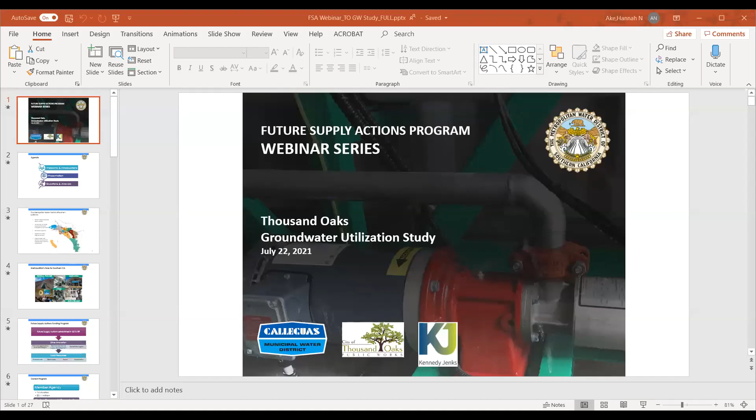Starting webinar in 5, 4, 3, 2.

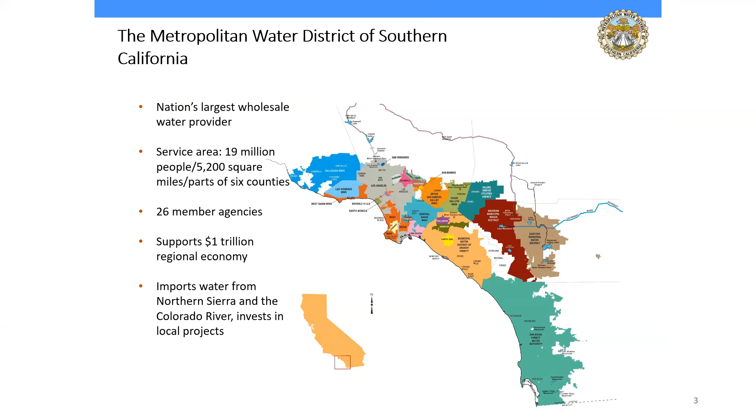Next slide. Over the past 30 years, we've invested billions of dollars to diversify our resource portfolio. That includes investments in storage, transfers, conservation, and local supplies. Innovation in local supplies is going to be fundamental to our success as a region as we continue to advance our One Water future, our One Water approach.

And this is where our Future Supply Actions program fits in. Next slide, please. The FSA program was established in our 2010 Integrated Resources Plan with the goal of driving innovation in local resources. Through our program, we collaborate with our member agencies to fund studies that pilot new approaches, pilot new technologies that create new supply development opportunities by addressing barriers to supply development. That could include technical barriers, institutional barriers, and regulatory barriers.

Benefiting the region is the core principle of the FSA program, and thus the purpose of this webinar. We want to share the results of these studies with as many people as possible. Finally, the water industry is risk adverse. It's through these studies that we de-risk technologies so that we can apply them to our operations.

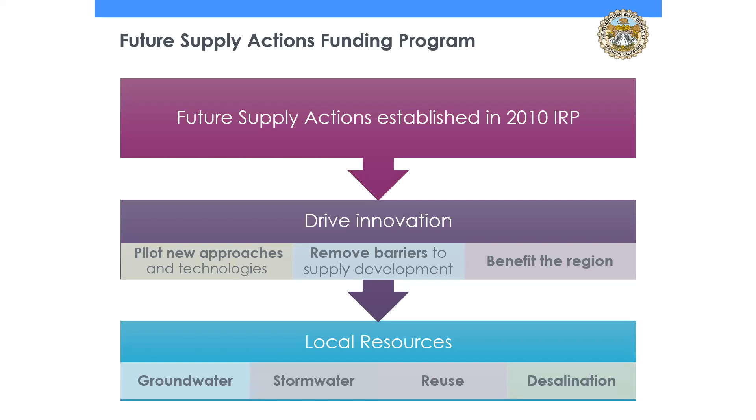Next slide. So our current FSA program includes 14 studies with our member agency partners, and they cover all 4 resources under the FSA program: groundwater, stormwater, recycling, reuse, and desalination. But we've also funded 7 studies with the Water Research Foundation related to reuse and agricultural reuse. These studies aren't going to help us with this current drought that we're in right now, but they will help us with future droughts, the next drought, and the droughts to come.

So next slide. All right, so the focus of today's webinar is the Thousand Oaks Groundwater Utilization Study. This study evaluates the use of closed circuit reverse osmosis, or CCRO, as applied to brackish groundwater desalination. Our member agency partner for this study is Calleguas Municipal Water District. Our presenters today include Ida Feruzin, an associate engineer with the City of Thousand Oaks Public Works Department, and Steve Diamond, a senior project manager and water treatment expert with Kennedy Jenks. At this point, I'll turn it over to Ida to introduce the study and launch the presentation. Ida, take it away.

Good morning, everyone. Thank you so much for joining us today. First of all, on behalf of the city, I would like to express our deep appreciation to Metropolitan Water District and Calleguas for supporting our project.

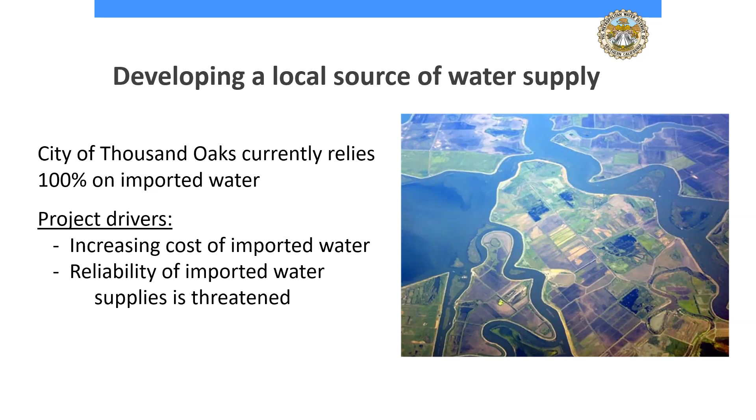Currently, the city's primary water supply is imported from Northern California through the State Water Project. As you know, the availability of the imported water is subject to long-term hydrologic patterns in the delta and can be substantially constrained during sustained drought conditions. As a result of these issues and increasing cost of imported water, the city is looking into developing local sources of water. Next, please.

In 2016, the city hired CDM Smith to prepare a study evaluating the feasibility of developing local water supplies. The study concluded that the Conejo Valley Groundwater Basin is a viable source of water for the city, and a near-term recommendation was to put the existing well located at the Los Robles Golf Course back into service and treat the groundwater.

To take this study to a higher level, in 2018 the city hired Kennedy Jenks to evaluate the feasibility of treating the groundwater at the golf course well to meet groundwater quality standards for both irrigation and potable water. This study looked at three critical issues: sustainable flow from the well, treatability of groundwater, and brine disposal feasibility. The recommended treatment technologies included conventional reverse osmosis and closed circuit reverse osmosis as primary treatments, with green sand media filter treatment for iron and manganese removal.

In March 2019, a 6-month pilot project was implemented to better optimize the treatment process and refine the design criteria, which is our presentation today.

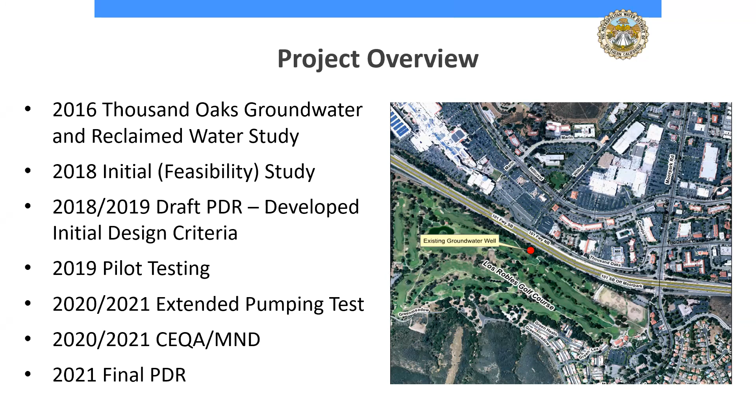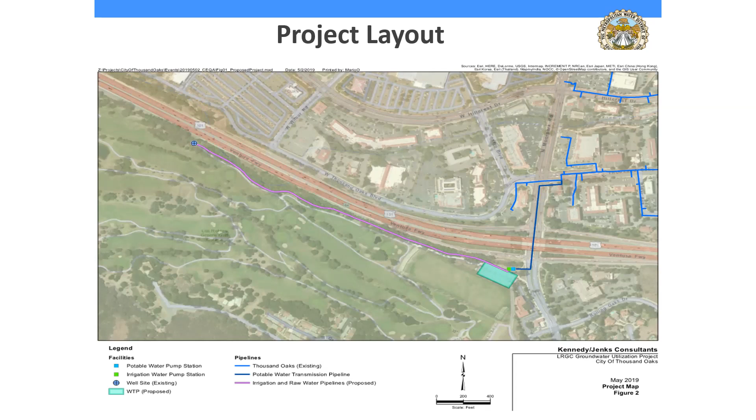As mentioned, in 2019 we conducted a 6-month pilot project. The goal was to refine the raw water quality and design criteria for key unit processes, including iron and manganese pretreatment, reverse osmosis, and closed circuit reverse osmosis. Another goal was to optimize performance of treatment trains and operation and maintenance requirements, and last but not least, to provide the city with operational experience.

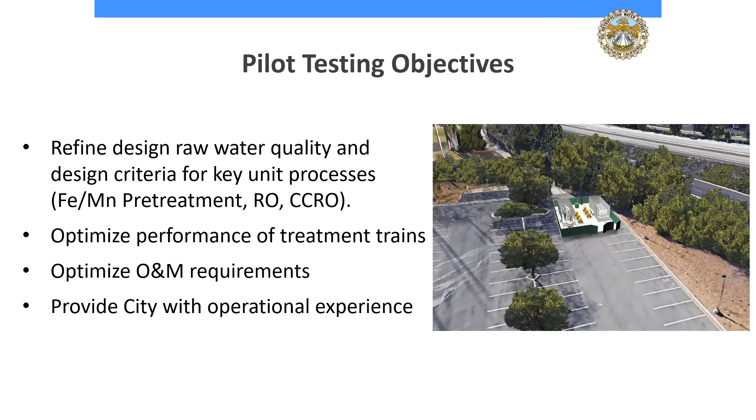So the first few slides we'll go over are on the equipment and the methodology, and then the last few slides are on the findings and results.

This project treats brackish groundwater in the Conejo Valley groundwater basin for both golf course irrigation and potable water uses. As a result of the treatment goals for both uses, desalination is required. Conventional RO and CCRO, or closed circuit RO, were identified in the feasibility study and draft PDR as the primary treatment alternatives, both utilizing RO membranes, and were identified for comparison as part of this pilot test.

A key component for these processes is pre-treatment, and historical groundwater quality indicated elevated iron concentrations. This pilot testing looked further at pre-treatment requirements with respect to iron. The alternatives were essentially iron removal versus no iron removal. For iron removal, we tested oxidation and filtration using chlorine, green sand filtration, and sodium bisulfite for dechlorination prior to the reverse osmosis and closed circuit reverse osmosis systems.

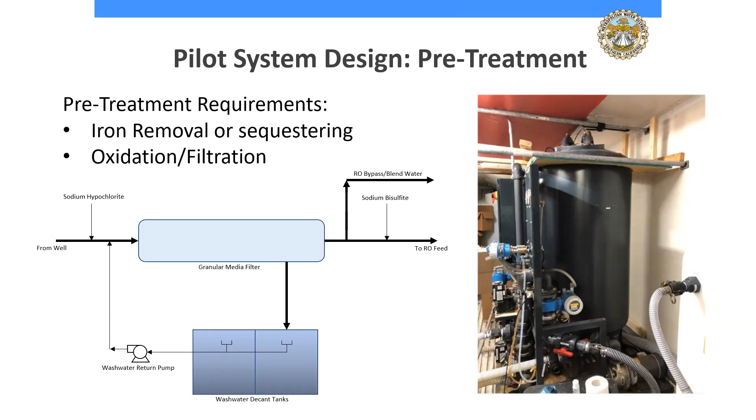The primary treatment alternatives included conventional reverse osmosis, a pressure-driven process where pressure is boosted to exceed the osmotic pressure of the water, with a water quality TDS of approximately 1,500 milligrams per liter, producing a continuous permeate stream and concentrate stream. The RO process included multiple concentrating stages to increase system recovery, typically with 6 or 7 elements per pressure vessel. Additional requirements identified included iron pretreatment, cartridge filtration, and chemical conditioning with antiscalant and sulfuric acid for pH adjustment.

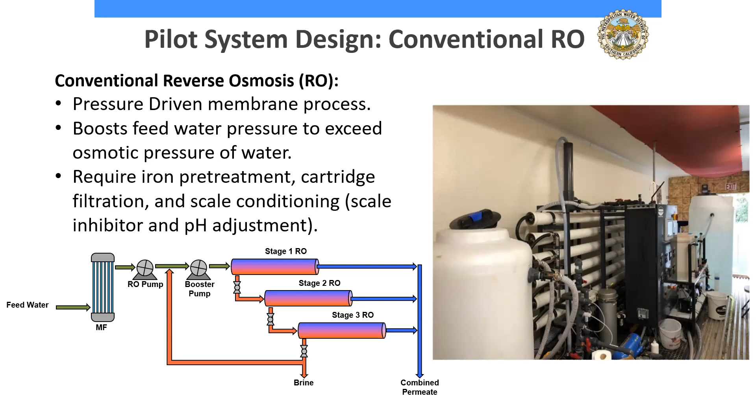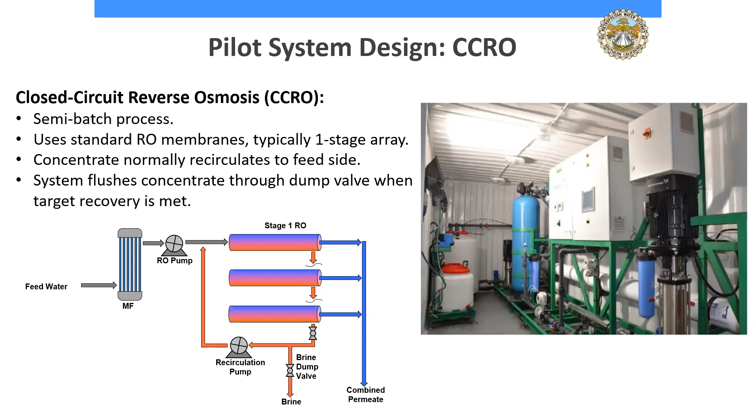The primary treatment alternatives also included closed circuit reverse osmosis, a semi-batch process where the concentrate normally recirculates to the feed side of the membranes. The CCRO system can use the same RO membranes as conventional RO. It is typically configured in a single stage array with 4 to 5 elements per pressure vessel. Typically, the CCRO system flushes the concentrate through a dump valve when the target recovery is met.

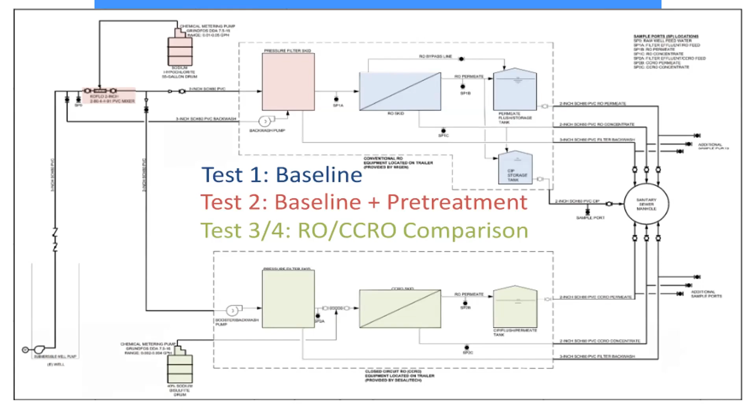This is a schematic of the pilot system layout, which was located in a remote parking lot at the Los Robles golf course. The raw water feed from the well comes into the picture from the left, feeding the conventional RO train on the top and the CCRO train on the bottom of the page. The trailers or containers for each system included their own separate iron pretreatment, which were based on the same design and intended to operate on the same operating parameters.

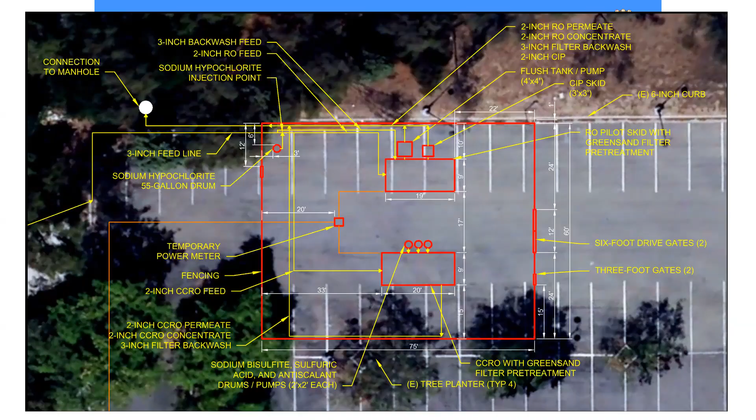As noted, the pilot test was broken into 4 separate tests, including a startup mobilization period and a shutdown demobilization period. Each of the 4 tests were scheduled for 6 weeks of operation, but the actual durations were extended for most of the tests as a result of typical pilot testing issues, such as mechanical issues with the pumps or instrumentation failures, or to conduct unscheduled cleanings or CIPs.

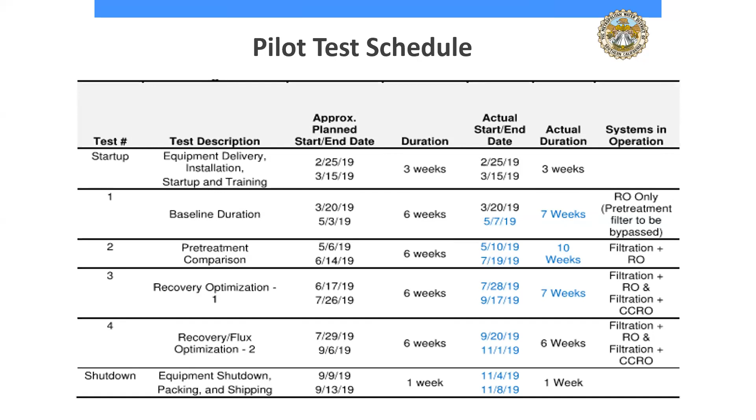So the pilot test learning summary. Starting with test number 1, on conventional RO only without iron pretreatment. The RO system was tested at a recovery of 79% with antiscalant and sulfuric acid for pretreatment conditioning. The testing parameters for the first test were based on desktop evaluations performed during previous work, and historical raw water quality from the LRGC well.

One of the benchmarks for each test was a projected CIP frequency of 3 to 6 months based on evaluation of normalized data during the test, and this test did not achieve that goal. One of the key observations during this first test was on the raw water quality, and that silica was the limiting scalant for conventional RO. Silica concentration during testing was significantly higher than the previous historical data.

Test number 2 was also conducted on conventional RO, but with iron pretreatment added, and it was also tested at a 79% recovery. The pre-pH adjustment with sulfuric acid was no longer added based on the results of the first test, and the CIP frequency goal was also not achieved. It was determined that the recovery of 79% was too high for this raw water quality.

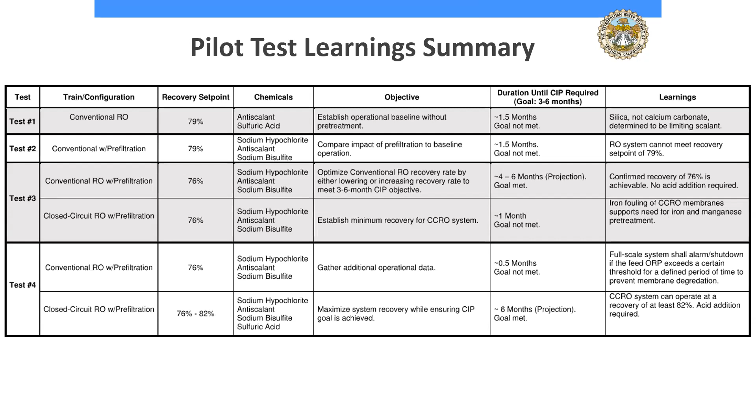Test number 1 results summary. Test number 1 was performed at a recovery of 79% on conventional RO, and the results indicated that this was too high for this configuration. The membranes were autopsied at the end of the test, which indicated both iron fouling in the lead elements and silica scaling in the lag elements. With silica scaling as a limiting scalant, pre-pH adjustment with sulfuric acid was proving to be counterproductive and was discontinued in subsequent tests for conventional RO.

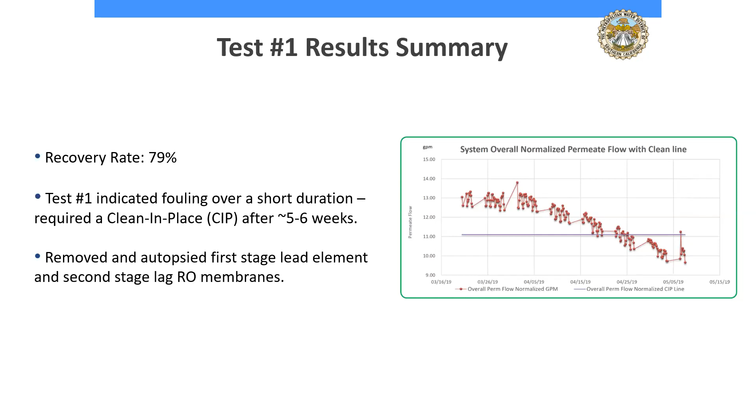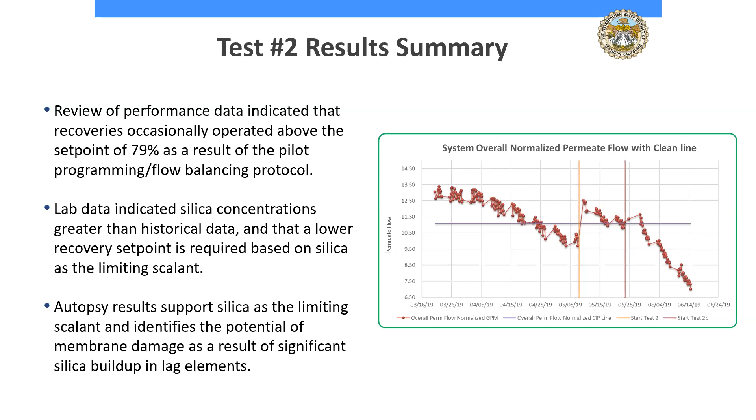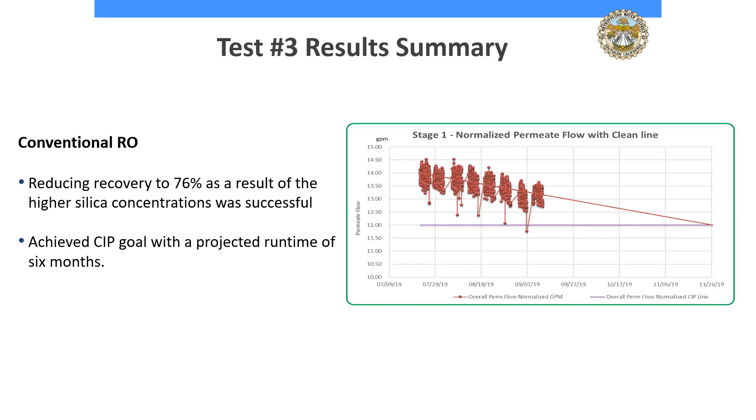Test number 3 was performed at the lower recovery of 76% on conventional RO with iron pretreatment. The results confirm this as a successful scenario by meeting the projected CIP frequency goal. Next slide, please.

Test number 3, CCRO results summary. So test number 3 for CCRO experienced a number of starts and stops and included 2 CIPs. This was as a result of issues with the iron pretreatment system and iron fouling on the membranes. This further confirmed the need for iron pretreatment.

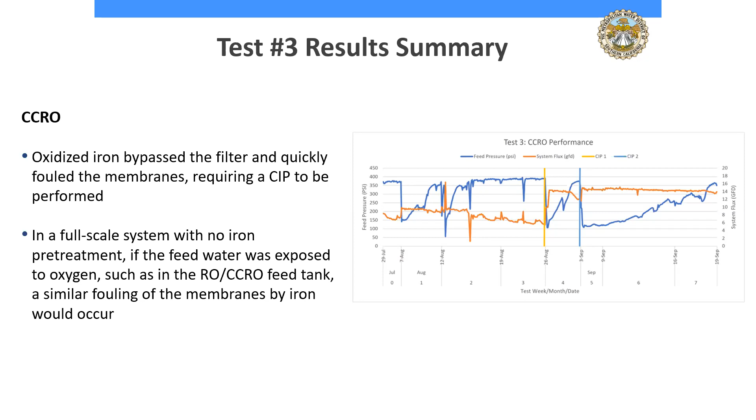Of note, though, after the second CIP, the iron pretreatment system was performing better, and the rate of increase of normalized DP was significantly lower than earlier during this test. Next slide, please.

Test number 4 results summary. So test number 4 for conventional RO was intended to be operated at similar test conditions to test number 3. The performance started off similar as before, but approximately 3.5 weeks into the test, it appears that the membranes were damaged as a result of overfeeding chlorine in the iron pretreatment system.

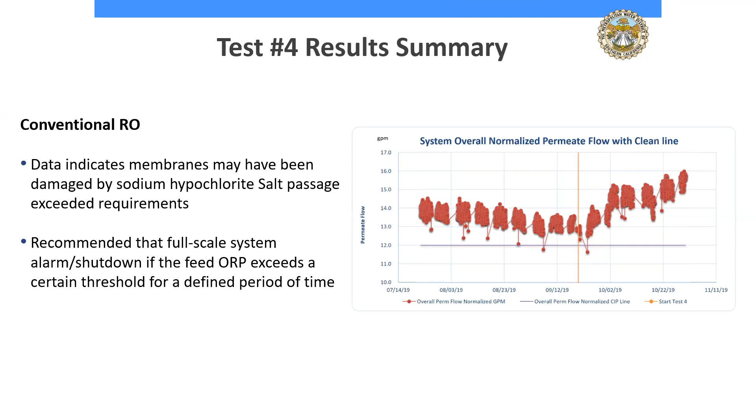The sensitivities to over and underfeeding chlorine, and also over and underfeeding sodium bisulfite, were understood going into the test, but the performance demonstrated at least one of these in this case. Instrumentation and controls on a pilot system can be limited, but including alarms and automatic shutdowns based on critical set points, such as ORP, was a recommendation for full scale. Next slide, please.

Test number 4 results summary for CCRO. So for CCRO, acid was added for pre-pH adjustment. The recovery was increased to 82%, starting from 76%. As noted before, there was limited scaling or fouling identified during the test, and the CIP frequency goal was achieved, as were the treated water quality goals.

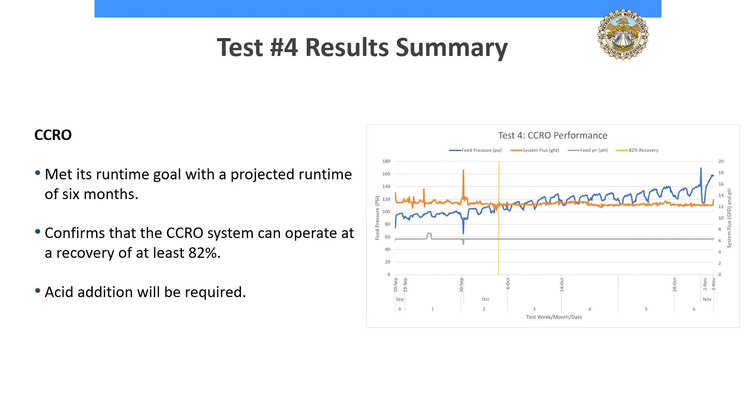The recovery of 82% was capped as a result of time allowed for the test, but the results indicated that higher recoveries could be feasible. Next slide, please.

Overall pilot test findings. The pilot tests provided a greater understanding of the range of concentrations to be expected from the LRGC well, including identifying silica as the limiting scalant. The previous studies suggested that calcium carbonate was the limiting scalant, so this was a significant finding. The results confirmed the need for iron pretreatment to meet the operational goals, and they demonstrated the disadvantage of pre-pH adjustment on conventional RO and the need for it on CCRO to optimize recovery.

They demonstrated the sensitivities of RO to iron pretreatment, oxidation, and filtration, and helped to identify additional instrumentation and control measures to mitigate these for full scale. And they allowed us to refine the recoveries for both conventional RO and CCRO and demonstrate the limits and potential for each. And they also allowed us to refine the bypass blending ratios required for each of the irrigation and potable water uses. Next slide, please.

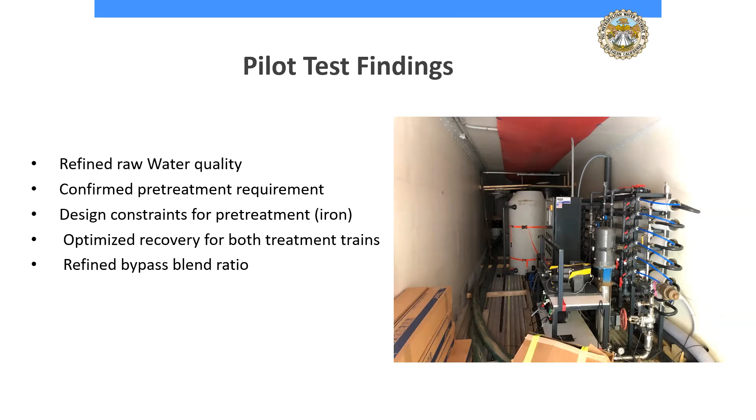So the regional applicability: for example, the CVGB is high in TDS, as are some other regional basins, resulting in the need for desalination, which could likely be RO. By comparing alternative RO technologies and optimizing recoveries for each alternative, there can be opportunities to further maximize the value of groundwater supplies, as demonstrated in the pilot study.

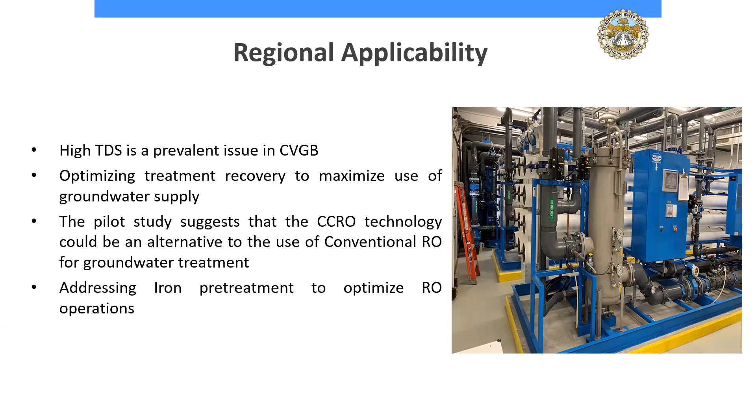The pilot study results indicated that CCRO is a feasible alternative for primary RO treatment of a brackish groundwater source, with opportunities to perform at higher recoveries than conventional RO. And the pilot study addressed iron pretreatment to optimize RO performance and demonstrated some of the sensitivities and mitigation measures to RO membranes of the chemical feeds associated with oxidation and filtration. Next slide, please.